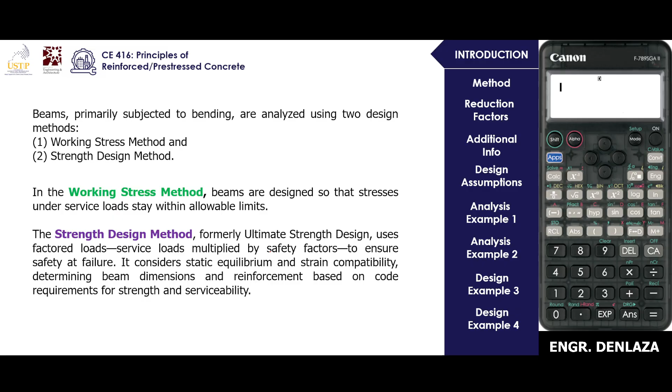And for us, based on our code, we do the strength design method. When you say strength design method, or again its former name, ultimate strength design, we are following a certain equation. So what is that equation that whenever we design, we analyze, we always abide by this governing equation? What is that equation? It's phi Mn is equal to, or greater than or equal to, Mu.

So phi is again your strength reduction factor. Mn, what is Mn? It's nominal capacity. And Mu is ultimate capacity.

Now, for those who have already taken RC, you know that Mu is just also phi Mn. Both of them are just phi Mn. But the question is, how do we design them differently? So phi Mn is typically designated as your design strength.

So when you decide which cross section to use, that cross section has its width, its depth, and as well as reinforcement. So whatever you design in terms of your reinforcement and actual sizes of your beam, and what strength it will generate, that is called the design strength.

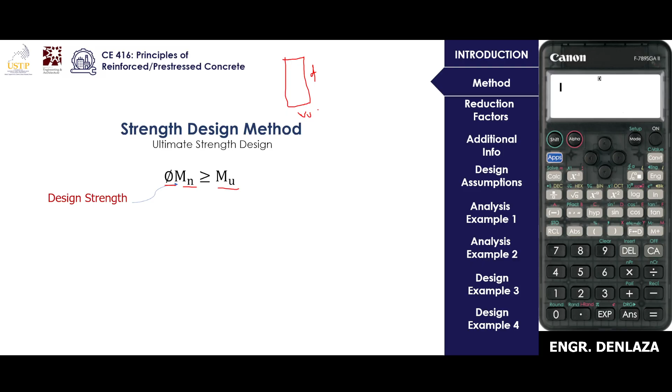Now, if we compare it to Mu, which is ultimate strength, this is the moment due to factored loads. So typically, the other term for Mu is actually actual load or actual moment. Why? Because your certain designed beam requires a certain amount of strength, and that's the ultimate capacity. I told you before that whatever you declare should always be less than what the beam can carry.

We, as structural engineers, as civil engineers, will not be declaring something that is exactly at the limit. What do I mean by that? For example, if a certain thing can carry about 213, you would not declare that it can carry about 213.

You will not be declaring that your beam can carry 213 kilonewton meter, because that's the unit for moment. We structural engineers should put in an allowance, and what we declare is 200, so that if it comes to carrying 201 load, your structure won't directly collapse. So that missing 13 is what you call the factor of safety. So again, if we put this into words, what you designed can carry 213, but what you declare is only 200. It's a similar concept here, where what your beam can carry is 200, but you designed for 213.

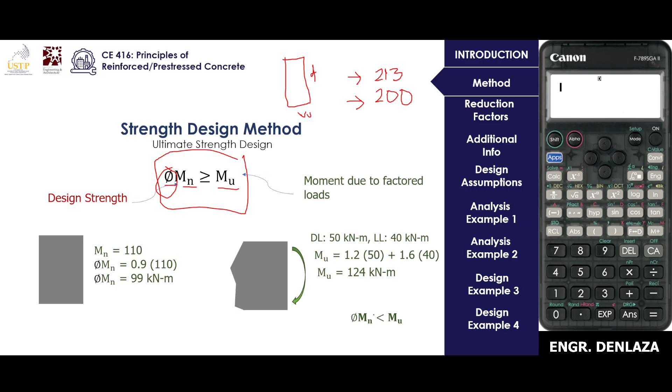So if you compare 99 and 124, you can see that your design strength is less than your actual moment capacity. So what does this tell us? It tells us that it's not okay.

So what can be done about this? If the minimum requirement is 124, what can we do? We will increase the size, or we will increase the number of reinforcements, so that what the design can actually carry for the beam should be greater.

So for example, if your requirement is 124 and you get a new value, let's say 130, which is your newly solved design moment, then if you compare 130 to 124, it's okay now because your design strength is greater than your ultimate moment capacity.

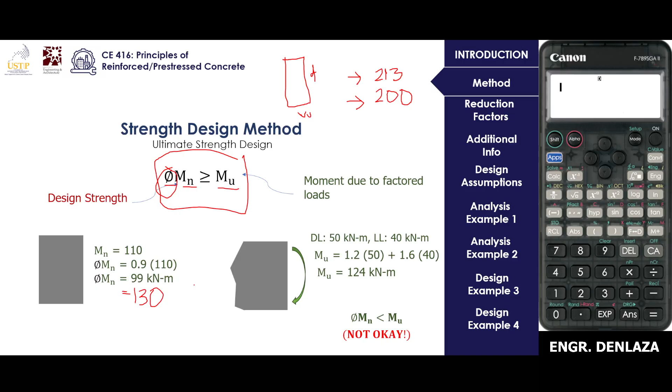So that means it passes. In other words, the requirement for your beam is just to carry 124 kilonewton-meter, and you have designed your cross section to carry 130. So that means it's okay, there's still a factor of safety of 6.

So again, let me introduce, like last time, the strength reduction factor. Since for moment, axial force, or combined forces, it has a range of 0.65 to 0.9. For shear it's 0.75, torsion 0.75, bearing 0.65, and so on.

So typically, in the analysis of singly or doubly reinforced beams, we use the moment, axial force, range of 0.65 to 0.9. Ma'am, I recall you mentioning that typically 0.9 is the strength reduction factor.

Yes, that's true, but not all the time. It will depend on what zone we are in — whether it's the compression zone, transition zone, or even the tension-controlled zone. That tension-controlled zone is typically where we designate the value for strength reduction factor as 0.9. That's typically what's assumed per code.

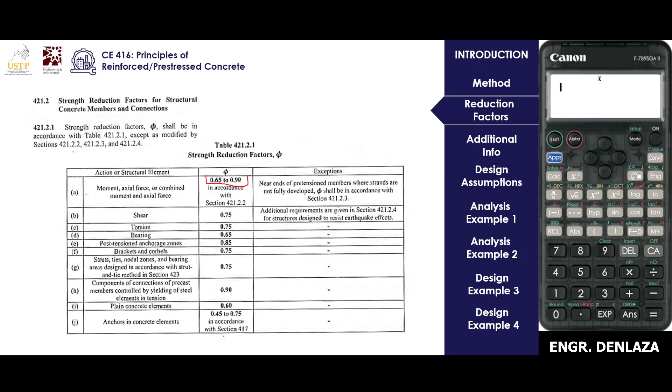But if we are to solve it again, there's a disparity between 0.65 and 0.9.

For a non-prestressed beam with PU less than 0.10 f'c times gross area, your tensile strain shall be at least 0.004. So how do we interpret this? In our analysis, in terms of flexure design...

Flexure is what we're analyzing, because we know that beams often have lesser capability or strength in terms of tension or flexure. So we design through flexure. Again, there are modes of design — actually three.

So how do I introduce this so it's easy to understand? Let's say we have a boundary line here, and we will designate this as NA. So let's compare team concrete versus team steel.

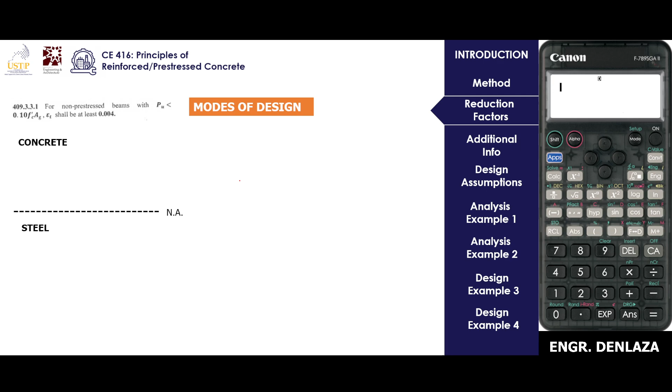So the first mode of design we do is where we put concrete on this side. Let's say concrete has 5 players. And now steel — how many players does steel have? 5 players for concrete versus 2 players for steel.

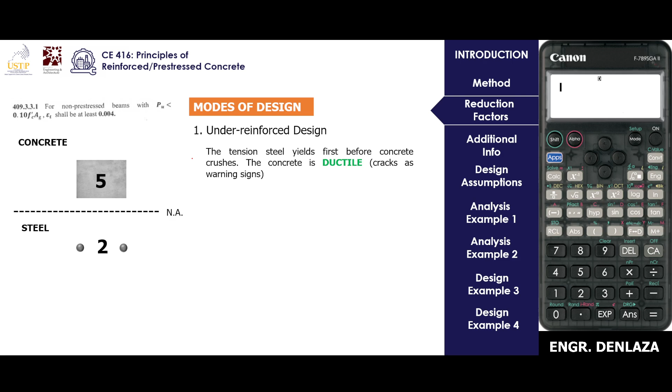This illustration or analogy presented here is what is called under reinforced design. What does this mean? The tension steel yields first, meaning it is exhausted or attains its ultimate strength before the concrete crushes. And the concrete is ductile, so it shows cracks as warning signs.

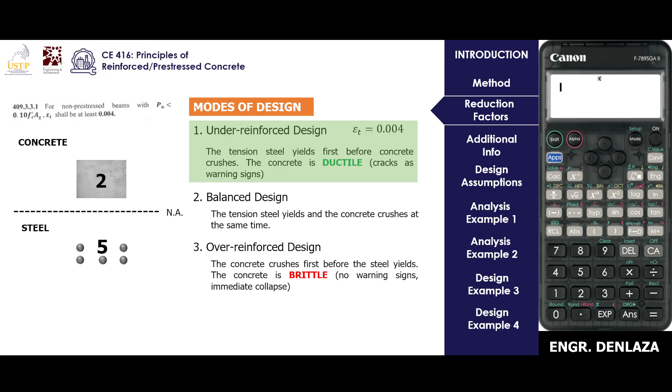So these are the three modes of design when designing our strength design. And typically, as structural engineers, we prefer doing under reinforced design, because we want to check that the steel has yielded first before we utilize the strength of the concrete, since concrete is known to be very brittle—it cracks easily. So at least if our steel has yielded and the concrete has cracked, we have signs that it's no longer safe, and we need to do retrofitting.

Additional information: your D over B, or depth over beam width, must be within a ratio of 1.5 to 2 to achieve an economical beam section. But what if the depth to beam ratio is 2.1—does that mean it's not allowed? No, it's still allowed, but if you're trying to achieve the economical side of it, you should maintain a ratio of 1.5 to 2.

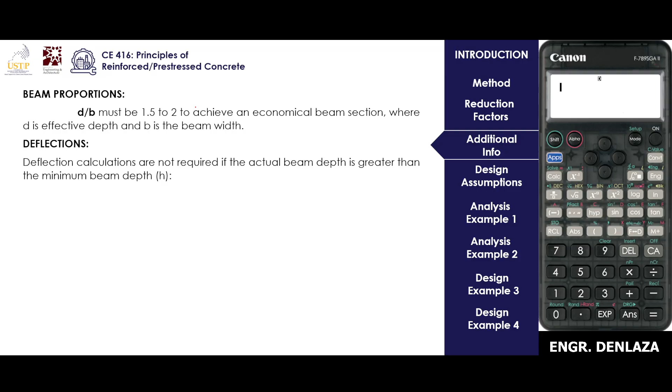So D is the effective depth and B is the beam width. And deflection calculations are not required if the actual beam depth is greater than the minimum beam depth.

So this is your equation or code based on NSCP. If it's simply supported, that's L over 16, and typically it's in mm. So let's say L here is 5 meters. If it's 5 meters, that's 5,000 divided by 16.

The minimum height of your beam should be around 312.5, so let's just round it to 325. This is minimum height, not the depth - minimum height na siya.

So again, from 325, you subtract the effective concrete cover, and that gives you the depth. And there are also limitations here.

It says that if your yield strength is 420, you will use this equation: 0.4 plus Fy divided by 700. So what does that mean? For example, your equation is 5,000 divided by 16. Since your yield strength is 420, you multiply it by 0.4 plus 420 divided by 700.

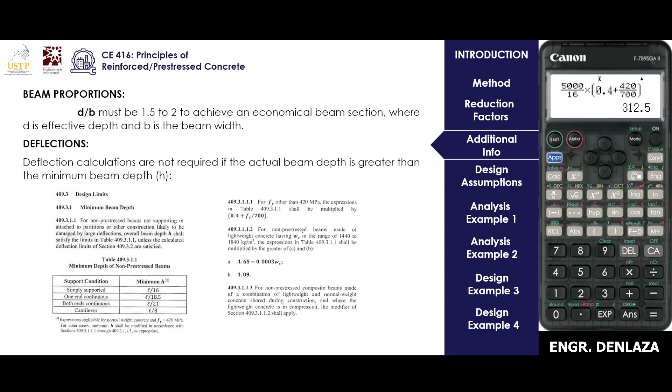Next, let's go back to the strength reduction factors. So for compression controlled section - what is this? It is a cross-section in which the net tensile strain in the extreme tension reinforcement at nominal strength is less than or equal to the compression-controlled strain limit.

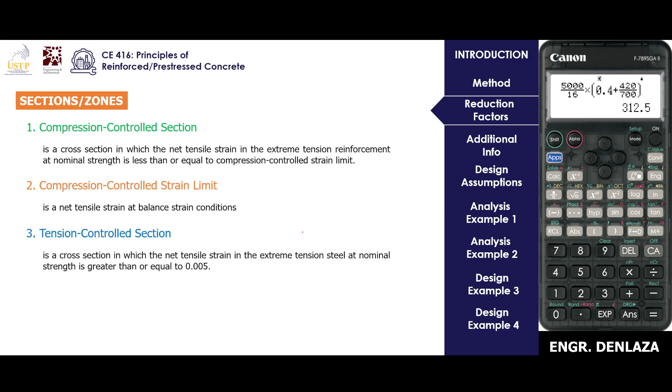This is easy to understand. Now if you compare it, the compression-controlled strain limit is the net tensile strain at balanced strain condition. And lastly, for tension-controlled section, it is a cross-section in which the net tensile strain in the extreme tension steel at nominal strength is greater than or equal to 0.005.

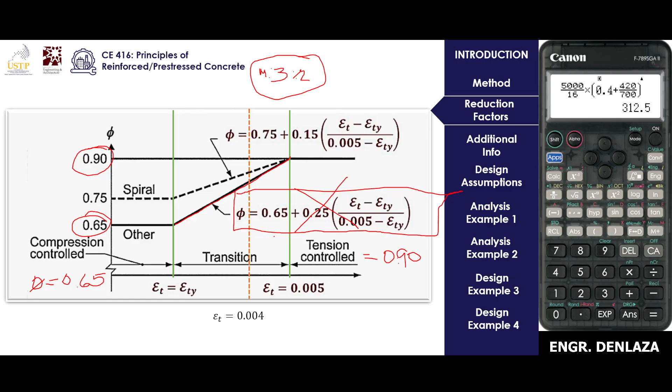That eliminates the need to memorize this. But it's good that you can memorize it too. If it's a rushed scenario, like in the board exam, just use mode 3-2 as long as it's in the transition zone. But I tell you, disclaimer guys - typically your singly reinforced designs end up being tension controlled, I promise.

And here, ETY is equal to 0.002. This comes from the graph illustration, which is based on the table as per NSCP. So that equation I highlighted earlier - 0.65 for compression controlled and 0.9 for tension controlled, and for your transition control, the equation I introduced: 0.65 plus 0.25 and so on.

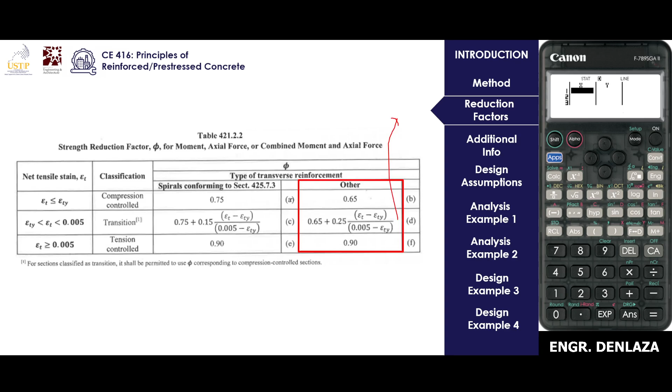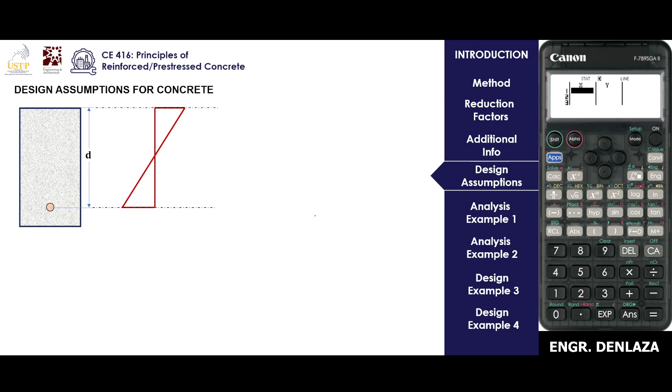This is called the stress strain diagram, guys. And the upper portion here, this is the stress strain designated at epsilon T, tensile strain. Maximum strain at the extreme compression fiber shall be assumed equal to 0.003.

Now let's see it, it's not visible at the top. So that's 0.003. If this is a positive bending, this is tension, this is compression. As per code, the maximum strain at extreme compression fiber should be equal to 0.003.

Now, this line here is your neutral axis. This top portion here is your C, or your distance from the compression fiber going towards your neutral axis. That's the simplest definition of C.

Remember MY over I? The other term for Y is C. This is C, that is the distance from the extreme compression fiber.

Why is it called fiber? This portion, if this is assumed to be positive bending, compression is really at the top. So that's the compression fiber, and the distance from there going towards your neutral axis, that's your C, your distance coming from the extreme compression fiber.

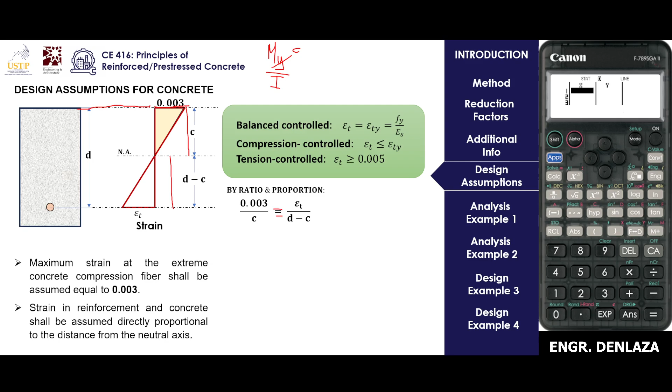Notice that highlighted portion, that's its behavior. Now, that's the governing equation on how you would be able to get the value of your tensile strain.

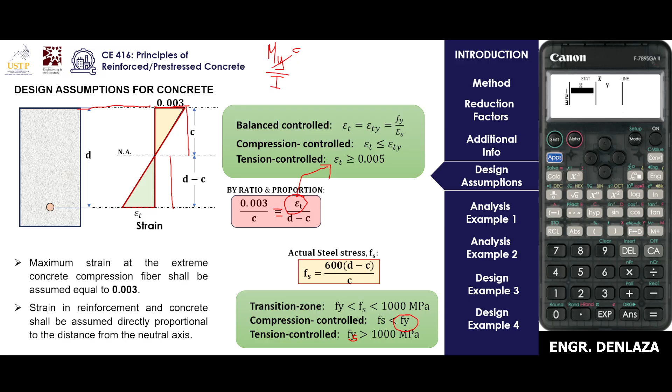Continuing this stress strain diagram, this is your stress. You have here, divide, this is your maximum compressive strength. And concrete stress of 0.85 FC prime shall be assumed uniformly distributed over an equivalent compression zone bounded by edges of the cross-section and aligned parallel to the neutral axis, at a distance A from the fiber of maximum compressive strain, which is calculated by this equation. So, A, that's what it is.

A is equals to beta sub 1 times C. What is this C here? C is this portion here. So what this means is that our compression block, or depth of stress block, or whatever other term for this, whether stress block, but basically depth of compression block, is smaller. That's designated as A. And beta 1 can be obtained by basing it on your FC prime.

So the values of beta sub 1 can be obtained from this table. If your compressive strength is within the range of 17 and 28, automatically your beta 1 is 0.85. Now, if your FC prime is within the range of 28 and 55, you use this equation. And if your FC prime is greater than 55, you use this other beta.

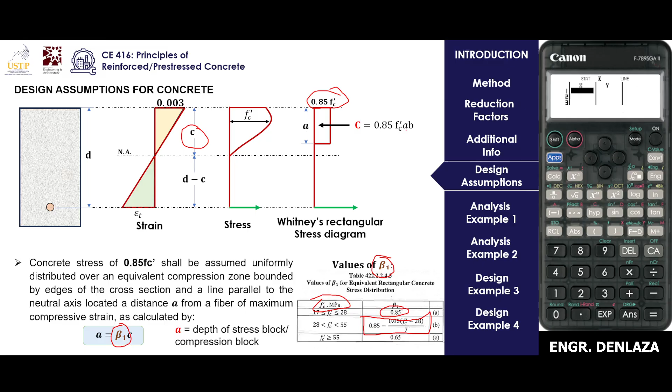Which has an equation of 0.85 FC prime times A times B W. If I use W here, that's the beam width. So that's 0.85 FC prime, then A, which is your depth of stress block or compression block or Whitney stress block, multiplied by the beam width. Then you counter that with your tension reinforcement, which has an equation of AS FY. What is this AS FY? That's the area of steel reinforcement multiplied by your yield strength.

So that you can attain equilibrium, whatever reinforcement you have here on the tension bar, you equate that to your compression bar so that it's in equilibrium. So you equate C is equals to T.

And the distance coming from your tension going towards your compression, that is now the lever arm, which is D minus A over 2. Because that's half of it, and this is the effective depth. You just get half of A, which becomes A over 2.

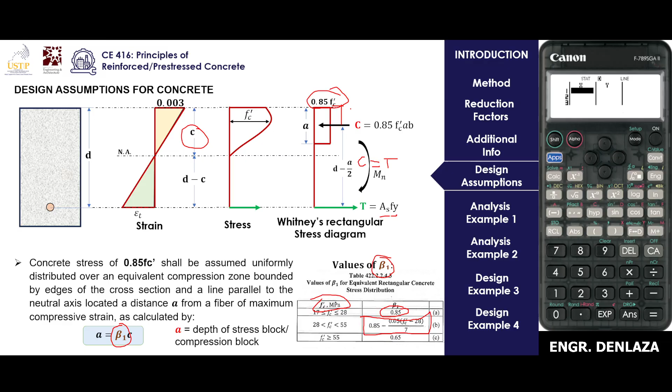Using the strain diagram, our equation, guys, that's 0.003 over C, and in another diagram, it's 0.003 plus E sub T all over effective depth, which becomes a triangle ratio and proportion, smaller triangle to big triangle. So if this is C balance, and this, change that into Fy over ES, right, because that becomes our EY, based on the balance condition. Simplify that,

and this becomes the governing equation under C balance. That is 0.003 times your effective depth all over 0.003 plus E sub Ty. And then another equation is 600 D all over 600 plus Fy. And that is the yielding strain. Wait, is that right? This one is tensile strain, this one is yielding strain, for those who are confused.

Okay. Steel ratio. We have this equation, still to be derived. That's rho is equals to AS over BD.

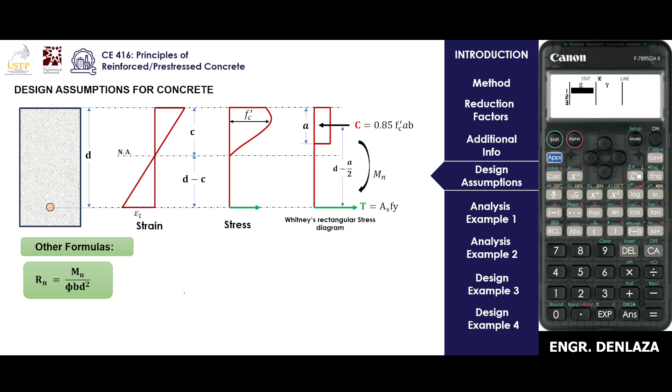So Rn, or coefficient of resistance, is equal to Mu all over phi bd squared. Phi here is typically 0.90. Rn is the coefficient of resistance. There's another equation: rho Fy minus rho squared Fy squared all over 1.7 Fc prime. And the highest equation, that's actual steel ratio: 0.85 Fc prime all over Fy, times the quantity 1 minus the square root of 1 minus 2Rn all over 0.85 Fc prime.

And your design strength, or actual strength, can be obtained using this equation - Mu equals phi Mn. And Mn can be obtained using C or T. You can use 0.85 FC prime AB, multiplied by the lever arm D minus A over 2. Or you can use ASFY times the quantity D minus A over 2. Either way, you'll obtain the same answer.

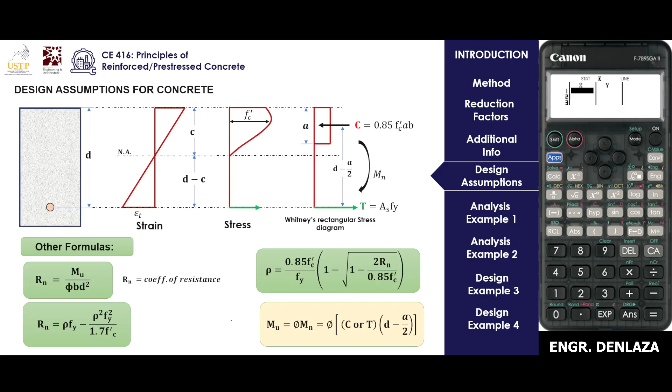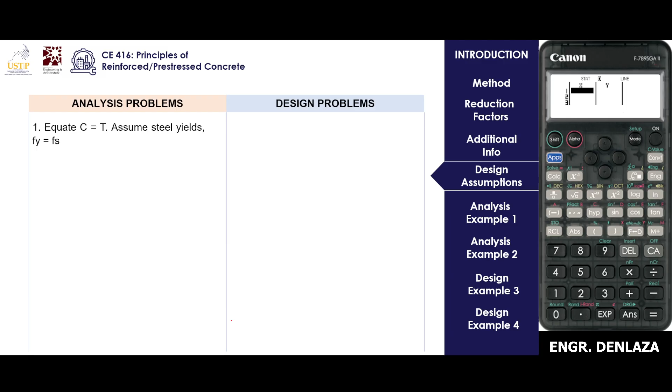So here are some steps to guide us in solving. For analysis problems in singly reinforced beams, always equate compression and tension first, and always assume that your steel yields. Second, solve for the value of A and C. A is the stress block, and C is the distance from the extreme compression fiber to the neutral axis. Now you have to check your steel ratios.

So there are many steel ratios to solve: the steel ratio, then the minimum steel ratio, and then the maximum steel ratio. Check if it's satisfied - that your minimum steel ratio is less than your steel ratio, and your steel ratio should also be less than the maximum. After that, you have to check if the steel truly yields or not, through method one.

It could be the strain diagram technique, where you look at ratio and proportion, or you can use the actual steel stresses, where Fs equals 600 times the quantity D minus C over C. Then compare it if it's greater than 1,000, and compare it to Fy. If it's greater than 1,000, automatically you are in tension control. If the steel does not yield, use T equals ASFS, where Fs equals 600 times the quantity D minus C all over C.

Then perform C equals T again, so you go back to the beginning. Next, use the appropriate reduction factor and solve for the strength reduction - I mean your design strength. That's it.

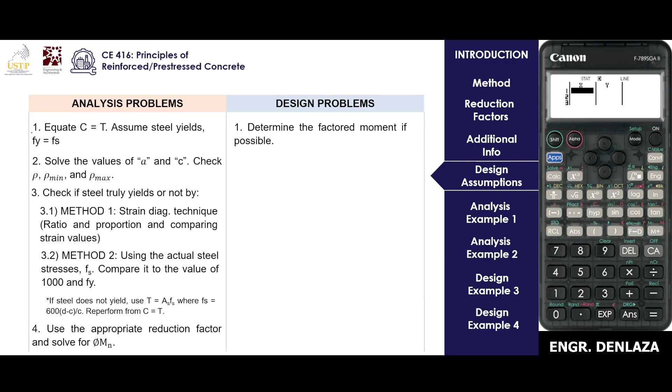If mag-design ka, kuha sa jud ka sa imong factored moment if possible. Kuha mo si coefficient of resistance or your Rn, kuha mo ang steel ratio using this equation. Then compare it to the rho minimum. Then kuha mo si area of steel reinforcement by using this equation, AS is equals to rho BD. Then determine the number of bars required by this equation.

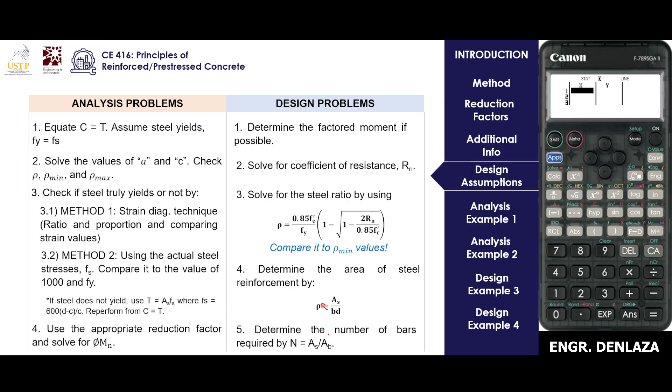N is equals to AS all over AB. So AS here is your area of steel reinforcement divided by the area per bar. So, butang na to, 25 mm. So, kuhaan nimong area per bar.

Ano siya? So, atong mga summary of formulas. Akong ipamutang dri. Ano akong gingon kaganiha? Kung ang imong FC prime is greater than 31.36 MPa, always ang mo govern kani nga rho minimum. Pag less than siya, always kani ang mo govern.

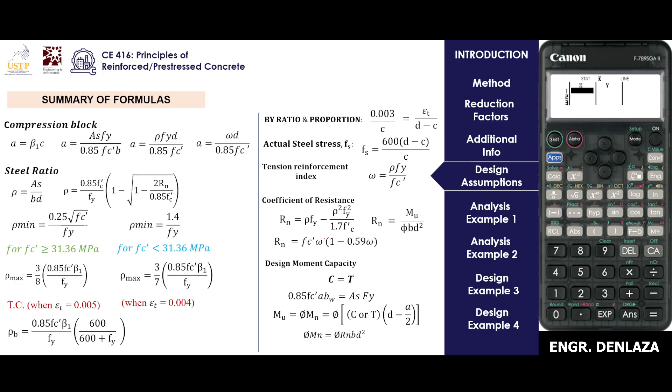So, muna siya, compression block, naa tay mga line equation. Dayon, ano pa ba? Steel ratio, nara. Rho maximum. Tension controlled o transition. Rho balance. Ratio and proportion. Actual stress. Tension reinforcement index. Coefficient of resistance. And then moment capacity. Mga importante? So, let's try solving example number 1.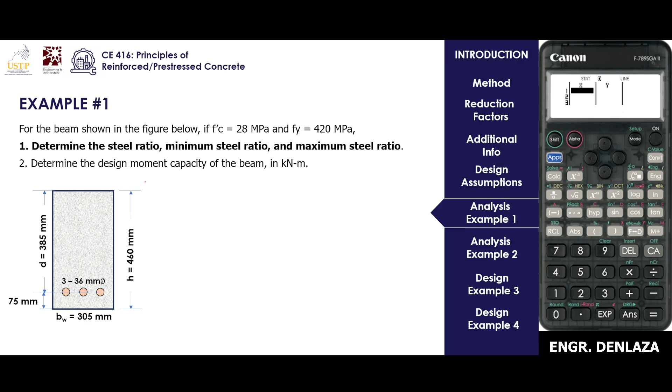Kuhaon na to si steel ratio minimum o maximum and mag-design ta sa moment capacity. Kuhaon na to si ØMn. So naa siya D, that's 385. So yun sa pagkuha sa effective depth, that's 460 minus 75, that's 385. Diba? And then steel ratio, unsa equation is steel ratio? That's equals to rho is equals to AS over BD. And since kabalo man ta unsay AS because we know that there are 3 36 mm bars, plug in: that's pi over 4, 36 squared times 3 because tulo man na nga tag 36 mm bars, all over your base times your depth, that's 385. And naka-answer nga

0.02600. Sa minimum steel ratio, unsa may FC prime ani be? 28. So that is way below 31.36. So automatically ang ikaduha nga steel ratio ang mo govern. Pero i-check na to para makita gyud ninyo nga tinuod. So plug that in, that's 0.25 square root of FC prime or 28 all over 420 nga may yield nga answer to be 0.00315. And comparing that to 1.4 over 420, nay siya answer nga 0.00333. So, if you would compare, always choose the bigger value.

So, kasi mas dako, 315 or 333, mas dako si 333. So, this is what will govern sa minimum. So, unsa to kung gingon, pag ang FC prime is less than 31.36, automatically si second equation ni rho minimum ang mo govern. So, which is true, diba? So, naa na kay steel ratio, naa na poy minimum steel ratio. Unsa nalay kulang? Maximum steel ratio.

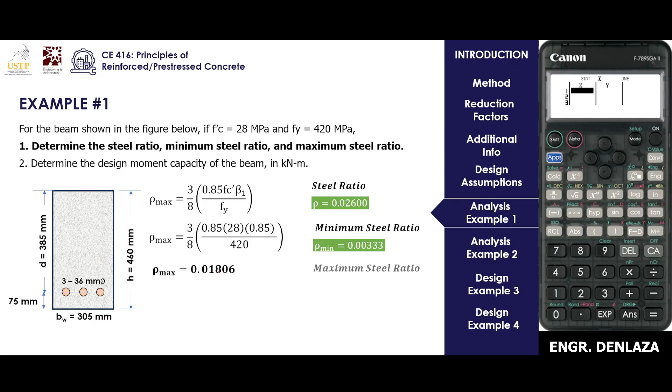Sa maximum steel ratio, assume ta nga naa ta sa tension control, and that has an equation of 0.85 at 3 over 8, 0.85 FC prime 28. Now, your beta nganong 0.85? Kay diba sa table, ang imuhang beta is dependent on your FC prime, that's 17 to 28, I guess. So 0.85. Simplify na kay makuha nga 0.01806. Sa steel ratio, mo ni siyang answer. Minimum steel ratio, mo ni siyang answer. And your maximum steel ratio has this answer.

So, mo to siyang answer. So, that's example number 1. Now, sa 1.2 na po ta, determine the design moment capacity of the beam.

I-check na to, kuhaon na to ang ØMn. Using the strain diagram, sa ta first. Sa strain diagram, we know that this is tensile strain and that is 0.003 at your compression fiber. This is C and this is D minus C, that's 385 minus C. So, equate na to si C and T, compression and your tension. Diba? And compression has this equation of 0.85 FC prime AB is equals to ASFY. Diba? Butang na akong W para dili libog.

Now, since you are interested in getting A, because that is the depth of your stress block, and this is always assuming that the steel has yielded, baka balutan nga stress block is equals to beta times C, right? So, ato lang na siyang i-expound para ang atong makuha value is just actually letter C.

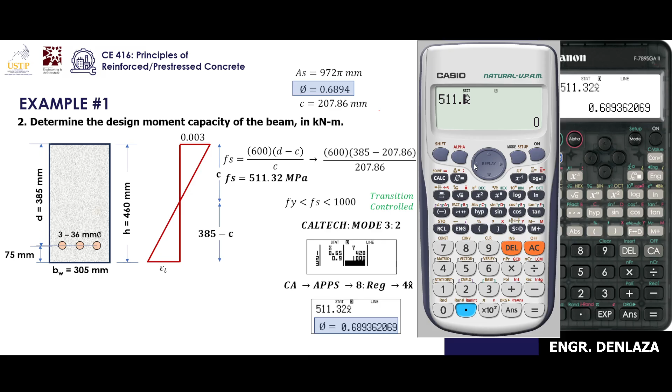We know that this is the equation for design moment capacity. As long as we have AS, FY, D, and A, we already obtained A. Or if we haven't obtained it yet, we still need C. So we multiply it by 0.85.

Nominal capacity, right? That is, let's put nominal capacity first, this is what's inside the equation, not yet multiplied by the strength reduction factor. That is AS, which is 972 pi mm squared, mm squared, then 420 your FY, D is effective depth which is 385, and minus A. Where does A come from? You know that A equals Beta 1 times C.

And since we already have C, that's 207.86. Then you know that our beta is 0.85. So 0.85 times 207.86, that's A, all over 2. So simplified, that's 380.47 kilonewton meter.

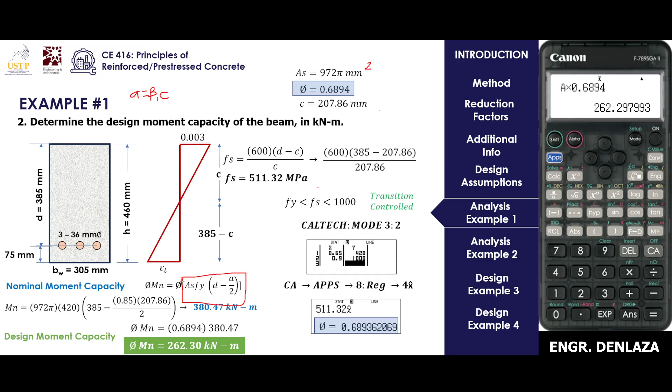It's fine even if it's not stored, just continue like that, going back without a precise value. That is 0.6894, just like that. So that's 262.30. You see? That's 262.30. So that's the final answer for this problem.

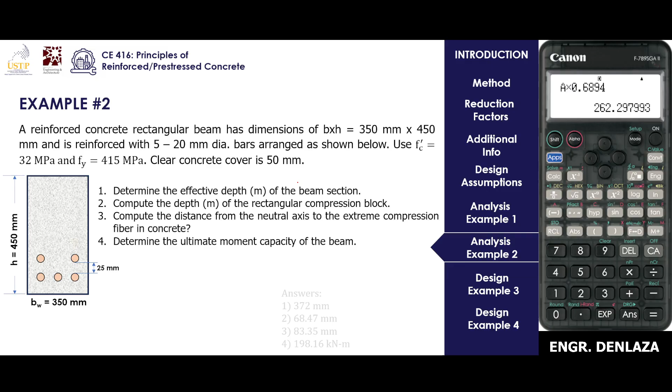So determine the effective depth, compute the depth of the rectangular compression block, that's A. Compute the distance from the neutral axis, that's C. And then determine the ultimate moment capacity. So it's similar to before.

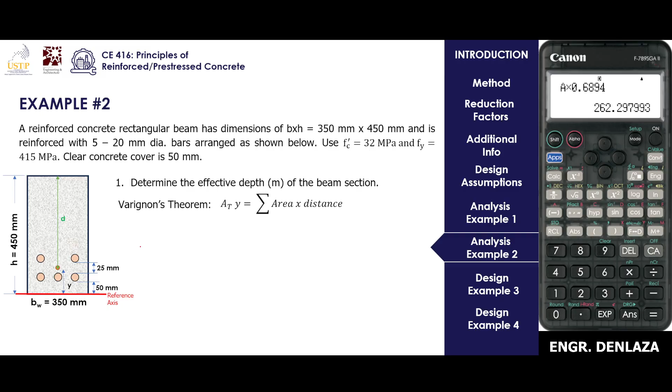How do we obtain the effective depth? You can actually utilize... let me put the values here, since we have 50 clear cover, then distance y. Let's set a reference axis at the bottom. We can actually use Varignon's theorem. And what's the equation for that? Total area, times bar y, equals summation of the area times distance.

So simplified, that's pi over 4, 20 squared, times 5, since there are 5 bars total. Total area, right, total area. And the bar y, which is here, equals... for the first layer, how many is the distance to their centroid? That is 3 bars. So that's pi over 4, 20 squared, since there are 3 of them in the first layer, so that's times 3.

Where does our distance come from? That is from the reference axis, that's 50, plus half of the bar, which is 20 over 2. Plus, since it's summation, for the second layer, there are only 2 left. So that's pi over 4, 20 squared, times 2. Now for the distance, what's that? That's 50 plus one bar, which is 20, plus 25, plus 20 over 2. That completes it.

So shift solve this, and you can get bar y to be 78. Why do we need this? To get the effective depth. That's 450 minus 78, and our effective depth now is 372.

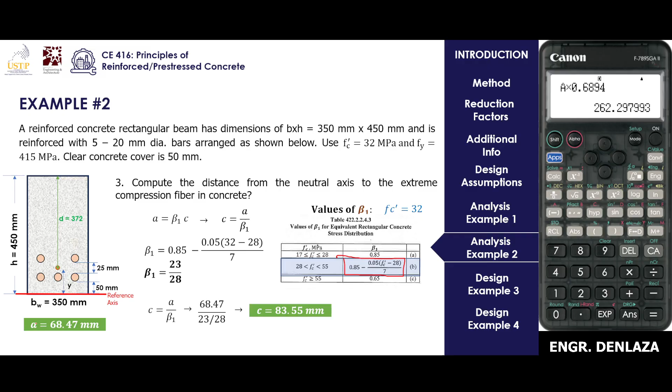And that's for problem number 2.3. For 2.4, we get the ultimate moment capacity. Same process, to make the solution shorter. Check first if it falls under which zone.

Actual stress, that's 600 times d minus c over c. Plug in your equations. The effective depth we solved earlier, minus c using Varignon's theorem. Then plug in c, that's 83.55. That is now 2,071.46.

And we compare this here. Notice that it is actually greater than 1,000. That typo there shouldn't be FY, it should be FS. So that should tell us that it is actually tension controlled.

When it's tension controlled, your strength reduction factor should be 0.9. So with the strength reduction factor and AS, which we already have, it's now easy to solve. That's 0.9, pi over 4, 20 squared, 5 bars, times FY, 415, times the quantity 372, which is your effective depth, minus A, which is 68.47, all over 2. Then divide by 1,000 squared, and you will obtain 198.16 kilonewton meter as your final answer for problem 2.4, which is the ultimate moment capacity.

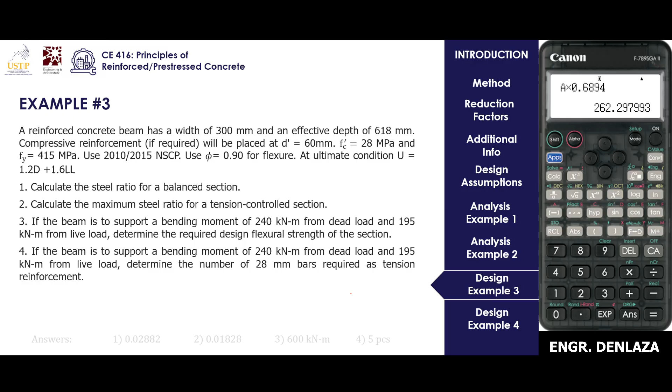Given, summarize. This is actually D prime, that's 60mm. Then calculate the balance steel ratio from the balance section.

Do you know this equation? That's 0.85 Fc prime beta 1 over Fy, 600 over 600 plus Fy, and take note 0.85 for beta since 28 MPa is our Fc prime. So that's 0.85 times 28 times 0.85 all over 415, quantity 600 all over 600 plus 415. Simplify, that is 0.02882, that's the balance steel ratio.

Calculate the maximum steel ratio for a tension controlled section. That's 3 over 8, 0.85 Fc prime beta 1 all over Fy. So 3 over 8, 0.85 times 28 times beta 1 again, which is 0.85 since our Fc prime here is 28. It hasn't exceeded yet, so automatic 0.85 all over 415 for maximum steel ratio of

0.01828. If the beam is to support a bending moment of 240 from dead load and 195 from live load, determine the required design flexural strength of the section. So you know this is the governing equation given earlier, the loading combination. That's 1.2 times 240 since that's dead load, plus 1.6 times 195, which is from the live load. Simplify, and the answer is 600 kilonewton meters.

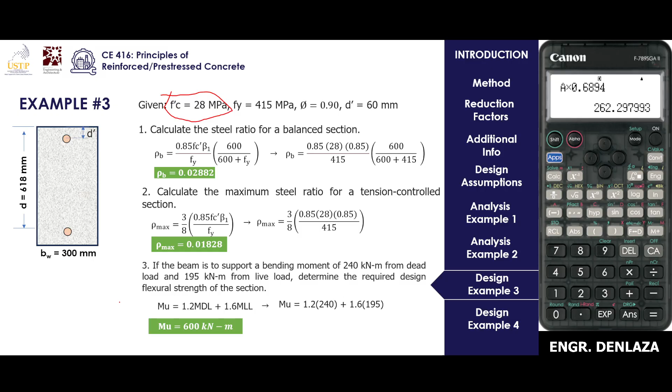So it's easy, automatic plug in 1, 2, 3. So those are the problems, example number 3.1 to 3.3. Now, if we are to

determine the 28mm bars required as reinforcement, I want you to recall this flow chart. Always remember these steps when you design. First you must obtain the moment. After getting the moment, get the coefficient of resistance. After the coefficient of resistance, get the steel ratio, then the minimum steel ratio and maximum steel ratio. Compare which is correct, then that's the one you'll use, and next is you will get your area of steel reinforcement, and finally get the number of bars.

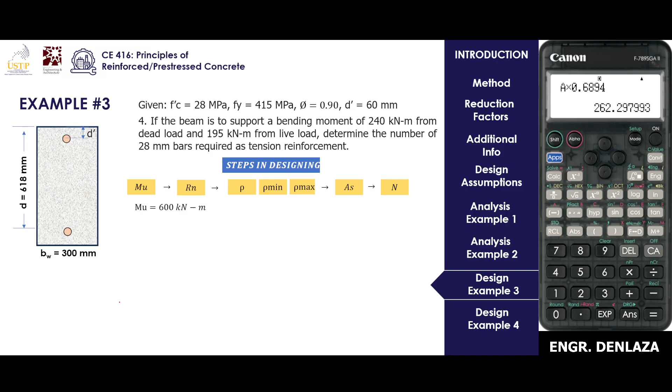Since we didn't change our loadings, that means the MU we got last, which is 600 kilonewton meter, is what we'll use to solve for the coefficient of resistance, which is Rn. So Rn now is equal to MU all over phi BD squared, and phi for flexure is 0.9. So that's 600E6 all over 0.9 times 300, which is B, and then D which is 618. Take note, don't forget this squared, many forget the squared. So that is the coefficient of resistance, 5.818 MPa.

Now after Rn, what do we get? Steel ratio, minimum or maximum. So this is the governing equation for the steel ratio. That's 0.85 Fc prime all over Fy, quantity 1 minus square root of 1 minus 2Rn all over 0.85 Fc prime. So what value do we need here? Just Rn, right? So whatever Rn is, that's what we plug into this equation. That's 0.85 times 28 all over 415, quantity 1 minus square root of 1 minus 2 times 5.818 all over 0.85 times 28.

Simplify to get the steel ratio, we get 0.01635. And for the minimum steel ratio, if you compare them, since 28 MPa is less than 31.36, I'm sure this one governs earlier. But for formalities, let's show it governs. So that's the one used earlier since we know Fc prime, so automatic that's used.

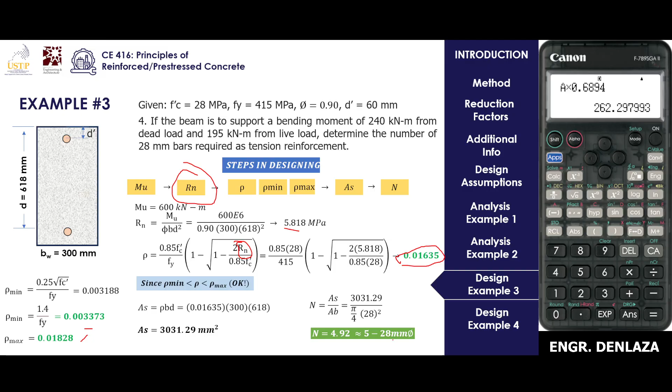So how many bars will yield? That's 4.92. And again, for these scenarios with steel reinforcement cross-sections, automatically round up. So that's now 5 pieces of 28mm bar. That's the final answer for this problem.

And now, we are down to our last problem, example number 4. Okay, let's proceed. So far, it's understandable.

For example number 4, a reinforced concrete rectangular beam has a width of 300 mm and a total depth of 480. It is simply supported over a span of 5 meters, steel strength Fy is 420 MPa and concrete strength Fc' is 28 MPa. Concrete cover is 70 mm from the centroid of the steel area, so take note, this is effective concrete cover. And unit weight of concrete is 23.5 kN per meter cube.

Other than its weight, the beam carries a superimposed dead load of 18 kN per meter and a live load of 14 kN per meter, and use 25 mm diameter bars in one horizontal layer only, and stirrup diameter is 10 mm.

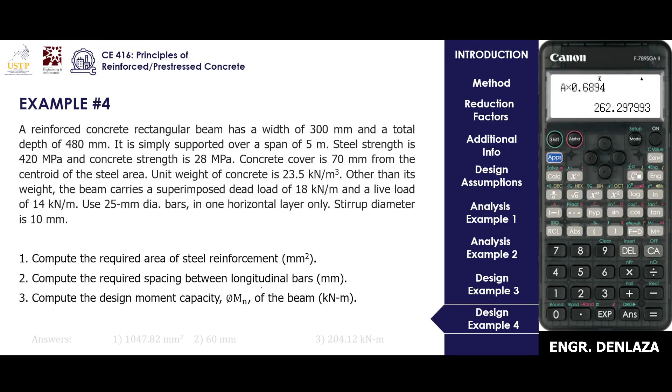First is to get the area of steel reinforcement, AS. Then get the required spacing in the longitudinal bars, that's SC. And then get the design moment. What is it?

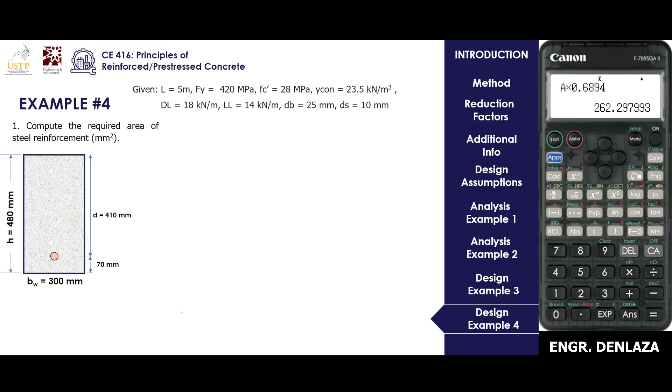MU. Do we have MU? No. So MU can be obtained from WU because this is simply supported. But take note, we need the dead load which is self-weight plus superimposed, because what was given earlier was just the superimposed loads, and we need to account for the self-weight of the beam.

So how do you get that? That is 23.5 times the height, 0.48, times 0.3 the width, plus the superimposed load of 18. Now, dead load is 21.384 kilonewton per meter.

And live load is just the same, since the live load doesn't contribute to self-weight, that's a dead load consideration only.

So now, plug in the dead load and the live load. That's 1.2 times 21.384, plus 1.6 times 14, giving a uniformly distributed load of 48.061 kilonewton per meter.

We still need MU. But take note, as mentioned earlier, it's a simply supported beam, so recall that the maximum moment for a simply supported beam is MU equals WU L squared over 8.